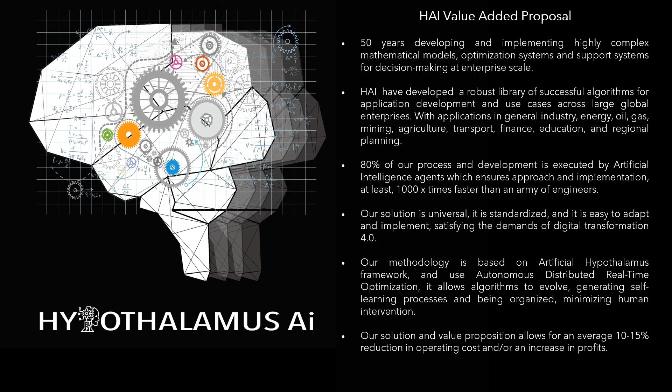Oil supply chain optimization: the oil and gas supply chain is made up of 4 links: upstream, midstream, downstream, and retail. The links are connected by multimodal transport networks.

The oil industry includes global processes of exploration, extraction, refining, transportation and marketing of petroleum products. The largest volume products in the industry are fuels, natural gas, fuel oil, and gasoline. However, petroleum is the raw material for many chemicals, including pharmaceuticals, solvents, fertilizers, pesticides, and plastics.

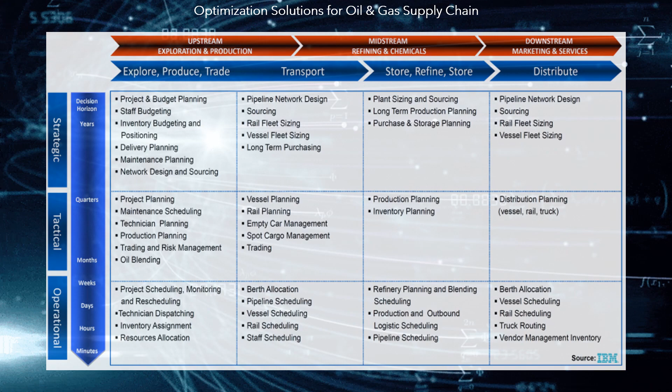The table, elaborated by IBM, shows a resume of the optimization solutions for oil and gas enterprises. The distribution chain of petroleum products begins in refineries, and ends at the sites of consumption of different types of products.

Optimization solutions in the transport chain of petroleum products can be classified by their hierarchy: strategic, tactics, and operating. Several of these applications will be discussed below.

Hierarchical coordination of planning tools. It is traditional to organize decisions hierarchically into strategic, tactical and operational. The operational decisions are divided into scheduling and advanced optimal control.

However, due to the technological progress generated by Industry 4.0, mainly in relation to smart metering systems, nowadays we can talk about a new type of online optimization modeling: real-time distributed optimization.

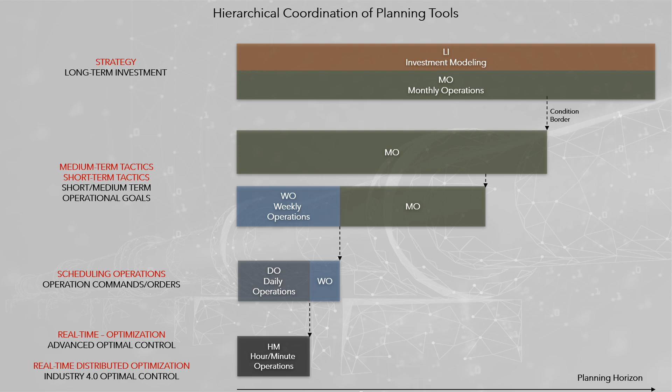From the point of view of mathematical modeling, hierarchical levels are intertwined and coordinated through the boundary conditions in time, and common modeling that can be shared. The modeling strategy of HAI is that all models of a decision support system can communicate with each other.

HAI Oil meets all the software solutions developed by HAI in different areas of application of mathematical optimization models, oriented to planning and to scheduling operations, in different businesses of the petroleum product supply chain.

Oil enterprise-wide optimization integrates mathematical models for each of the links in the oil supply chain, in such a way as to manage the planning of the supply chain with a holistic vision. The design of HAI Oil EWO was the result of work done for a multi-business oil company.

The union of models, and their coordination, forms the hypothalamus of an oil enterprise. The current computational power allows detailed modeling of the supply chain, considering individually all the systems that compose it. This allows visualization of all the existing bottlenecks that affect the maximization of economic gains.

All models developed by HAI, to support decisions in the oil industry, are interconnected through an information system. In this way the construction of the artificial hypothalamus is a question of joining the equations that make up the different models. Oil transport systems optimization corresponds to a general model, common to all types of oil products: raw, refined, natural gas, and biomass, which represents the process for a specific system, including particular equations when this is required.

It considers 2 types of transport modes: pipes and multimodal vehicles, like vessels, barges, train tanks, and/or truck tanks.

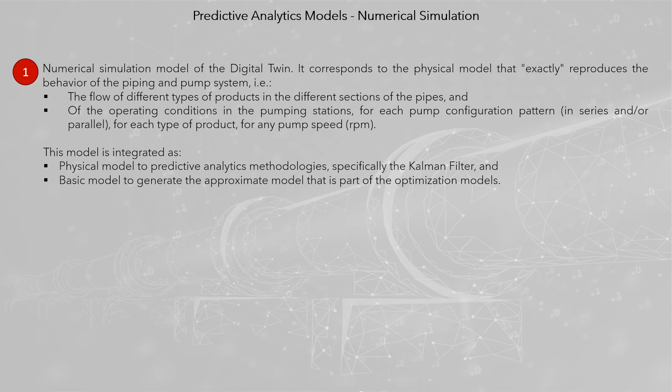Numerical simulation model of the digital twin. It corresponds to the physical model that exactly reproduces the behavior of the piping and pump system, that is, the flow of different types of products in the different sections of the pipes, and of the operating conditions in the pumping stations, for each pump configuration pattern, in series and or parallel, for each type of product, for any pump speed. This model is integrated as a physical model to predictive analytics methodologies, specifically the Kalman filter, and basic model to generate the approximate model that is part of the optimization models.

The numerical simulation model produces matrices, or tables, that are the reference of the exact operation of the piping system and pumping stations, and these tables numerically represent functions of the energy consumed as a function of pressure, flow rate, product type, DRA injection, ambient temperature, etc.

Validate and correct advanced analytics models, mainly optimization models. State estimation models the prediction and estimation of the variables that represent the state of the system. These can be pressure, flow, RPM, roughness, density, etc., and physical model parameters, estimation of the parameters involved in the equations that represent the physical system, and which are subject to uncertainty.

It is considered that the appropriate methodology is the Kalman filter, KF, including some of its variations and extensions. KF is, perhaps, the oldest and most robust methodology of hybrid predictive AI.

The numerical simulation model can be used to generate synthetic operation samples, as it is assumed to correspond to the exact representation of the system, and thus enrich the database, very useful in the case of young systems with few historical measurements.

Prescriptive analytics. To optimize, the following models are required. The operation, dispatch, of the pipeline, at least one or two days in advance. This implies a real-time operating model, whose planning horizon is divided into periods of hours, fractions, and which can be redispatched at any time, and the transport of hydrocarbons in relation to nomination, DRA dosage, energy consumption month by month.

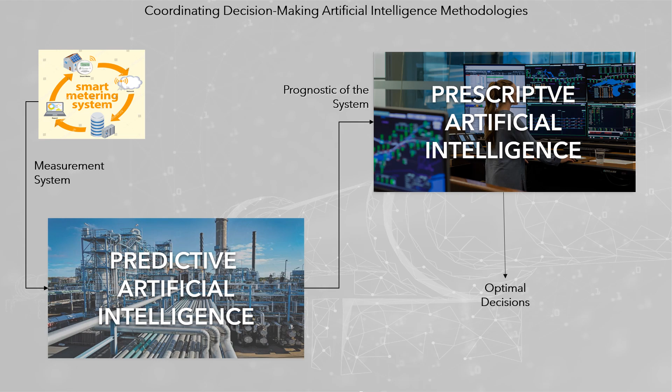Pipelines energy modeling. Predictive analytics models, forecasting. Based on hybrid models, model-driven plus data-driven, supported in state estimation methodologies, more specifically improvements and variations of the Kalman filter, KF.

Overall, the minimum functions of these models are smoothing, filtering and forecasting of the viscosity value of the crude oil transported in real time at any point of the pipeline, taking into account that, on a daily basis, laboratory tests are carried out to establish the viscosity value that is being transported. This actual viscosity data is confirmed a day after the shot by analysts.

Smoothing, filtering and forecasting of the viscosity value of products in real time, assuming that an inline viscometer is available. However, the measurement of this is not exact, but it maintains precision and allows you to verify the trend of the measurement. Identification of the operating periods during which, due to the quality of the product, density and viscosity, the dosage applied affected the transport of hydrocarbons.

Given the characteristics of KF, smoothing, filtering, and forecasting of the value of the pipeline's operating variables at any point, using the pipeline's physical model, and smoothing, filtering and forecasting of the value of pipeline parameters, e.g., roughness, slope, etc., when it is considered that these may be subject to uncertainty.

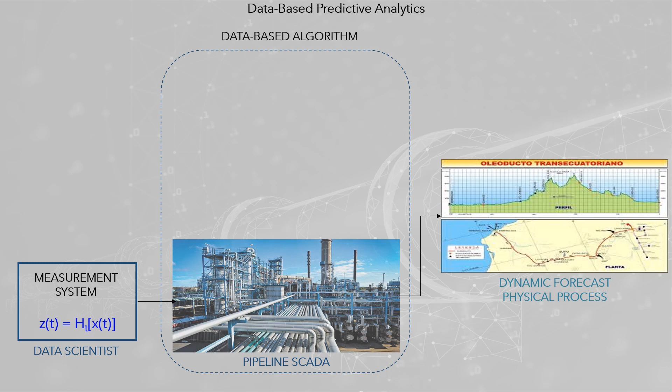Model-based models are based on the numerical simulation model, which must be fitted by means of algebraic expressions, to be expressed as a system of stochastic differential equations, finite differences, or finite elements. This requires an expert in the field of interest, in this case fluid mechanics, mainly in the transport of petroleum products. The integration of the two approaches gives rise to hybrid predictive analytics, which can be considered the appropriate method that takes advantage of the mathematical knowledge of the physical system and historical information.

The most well-known method, and most used, for more than 65 years, is the Kalman filter. The state estimate describes the system based on state variables, characterized by discrete, empirical probability distributions, and dynamic, empirical probability distribution functions that evolve over time.

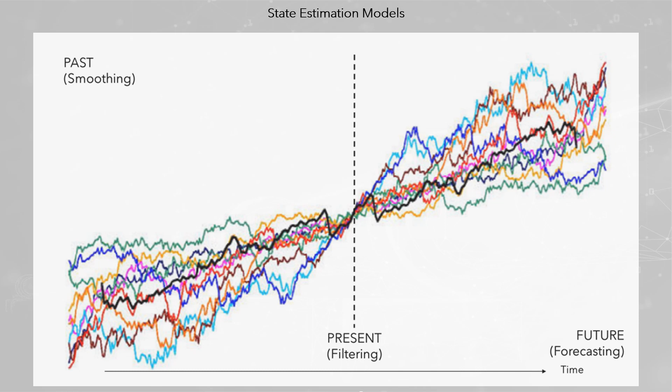Forecasting, predictions about the future, and filtering, predictions for the present. In a system under uncertainty, correcting the past may be just as important, if not more so, than forecasting the future and estimating the present.

Examples of applications of the Kalman filter in pipelines are system monitoring, parameter calibration, leak detection, and maintenance following PHM methodologies. Those interested in delving deeper into state estimation applied to the oil industry are invited to watch the video: Oil and Gas, State Estimation.

Optimization models.

Planning on a monthly level. It determines operating rules and practices that are optimal when the planners want to operate based on fixed operating rules over a period on the order of months.

The results of this model are as follows: batch cycles, order of the type of products, e.g. crude field 1, crude field 2, crude field 3 - this constitutes one batch cycle; and the number of pump cycles, to have an optimal line full.

The size of each batch, volume of each type of crude oil within the cycle, the expected DRA dosage for a certain batch program, and optimal setting of pumping patterns for a certain batch program.

Based on the above results, it is possible to plan the consumption of resources in the short to medium term, and if necessary, program the operation at a daily level, given a set of batches that you want to transfer along the transport system. Daily scheduling determines the optimal operating conditions for a planning horizon on the order of days.

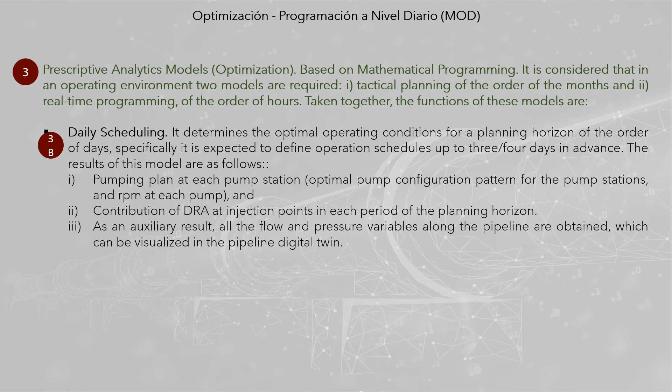The two models share equations and processes and differ in the specific characteristics of monthly tactical and daily real-time planning. The objective function of the models may vary according to the criteria of the decision maker, such as minimizing cost of operation, minimizing energy consumption, and maximizing oil products transfer.

The models, together or individually, can be used to support other decisions related to the operation of the transportation system. For example, supporting the ATP, available to promise, decision to accept or refuse transport of operational volumes for customers who request it without having a prior agreement.

To solve the mathematical problem of optimizing prescriptive analytics of a system, several approaches can be used: mental models, intuition and goodwill, simulation, physical model plus human reasoning, meta-heuristics, smart reasoning, machine learning, experiences, and best practices.

And mathematical programming, physical model plus optimization mathematics. Of the above alternatives, the only one that can guarantee optimal solutions is the one based on mathematical programming.

For many leading companies in the production of advanced analytics technologies, such as IBM, stochastic optimization and deterministic optimization are the analytical technologies that produce the greatest competitive advantage, and that provide the greatest ability to handle complexity.

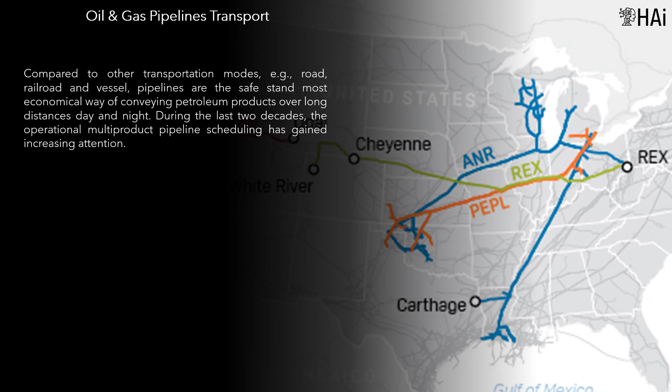During the last two decades, operational multi-product pipeline scheduling has gained increasing attention. The problem of optimization of pipelines involves safe, reliable and economical operation, in which, for each moment of the planning period, the flows, pressures and configurations of the pumping stations must be determined.

According to the different types of products that must be transported through the pipeline network.

The goal of the operation moves between 2 criteria: minimize energy consumption, an environmental criterion important to preserve the sustainability of the planet, and minimize the cost of energy, an economic criterion important in energy markets where rates change throughout the day.

On the other hand, the technical operating conditions, hydraulic conditions along the pipelines and at the pumping stations, must be respected regarding the flow of multiple, different batches that must flow through a network of pipelines that involves the synchronization of multiple sections connecting several production fields, refineries, and ports. The transportation system has 2 fundamental components: the pipeline system and the pumping stations.

The planning and scheduling of transport operations of products through pipelines, oil and refined products pipelines, aqueducts, gas ducts, and mineral pipelines, is done using 3 coordinated models. Sales and Operations Planning, S&OP, determines the total optimal volumes transferred during the planning periods, regardless of the sequence of products in the pipeline.

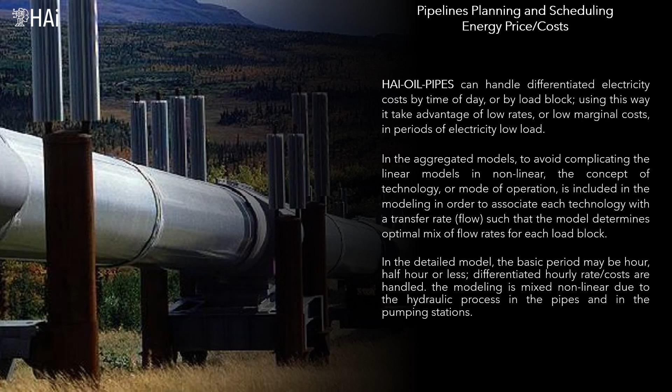The hydraulic characteristics of the flow depend on the type of oil product that is moving along the pipeline, and the blending of these crudes along the segments of the pipelines.

Three types of pipelines exist: oil pipelines, which transport crude oil from oil fields and ports; polyducts, which transport refined oil products like gasolines, diesel, and jet fuel; and gas pipelines, which allow combustible gases, natural gas, and liquefied petroleum gas, to be transported on a large scale and over long distances.

The optimization mathematical models for pipeline transport systems can be used with one of the following objective functions: minimum power, minimum cost, and maximum flow.

Optimization strategy: the problem-solving methodology must speed up the optimization process. The chosen method is based on problem breakdown for the different periods that make up the planning horizon.

The synthesis of the behavior of pumping stations by means of a non-convex hull for variables that synthesize their optimal operation as a function of pressure P and flow Q, for a given type of product associated with the batch, and coordination of the optimal solution using a Lagrangian coordination scheme.

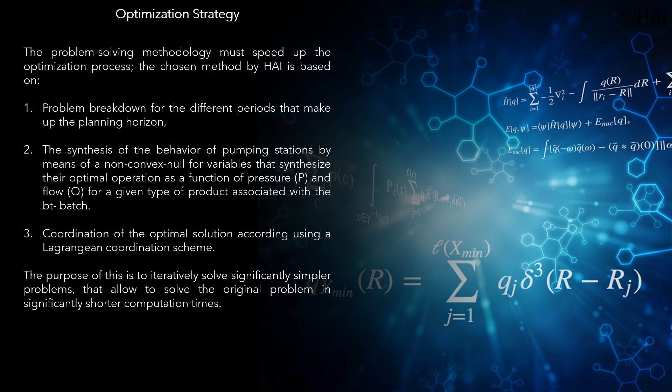The purpose of this is to iteratively solve significantly simpler problems that allow solving the original problem in significantly shorter computation times. After several analyses and numerical experimentation with mathematical models representing the detailed problem, the following design principles were reached in order to make the solution viable as specified.

Split and decompose the problem into multiple problems of lower dimensionality to obtain the solution based on an iterative process. Maintain the format of the problems as linear or quadratic to take advantage of solvers specialized in this type of problem, and perform pre-processing of information to accelerate the solution, offloading unnecessary repetitive calculations from the optimization model.

Pumping stations modeling. In the oil industry and other industrial processes, pumps are divided into two general classifications: variable head pumps - centrifugal and turbine - and positive displacement pumps, which include reciprocating and rotary pumps such as screw pumps.

The screw pump is one of the commonly used rotary-type pumps in the oil industry, mainly used in low-flow operation where the efficiency of a centrifugal pump would be very low. On the other hand, the versatility in handling high-pressure heads makes the centrifugal pump the most used in industrial applications.

The effect of a pump on a system is to increase total energy. The action and operation of a pump is defined in terms of its characteristic curves. These curves relate the capacity, or flow, of the pump in volume units per unit of time, versus the discharge pressures.

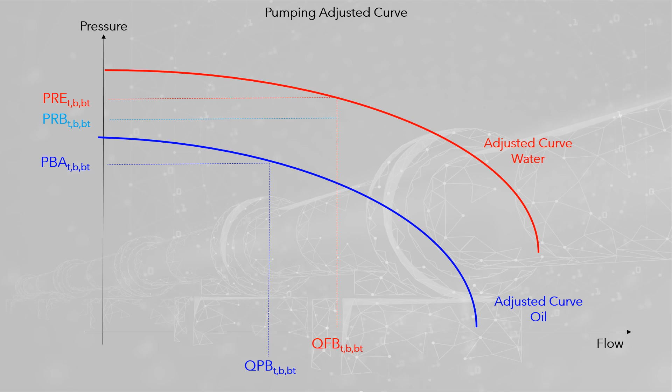If the pump rotation speed changes, adjustments must also be made to determine the actual operating conditions of the pumping station. When a defined flow is required, and knowing that the system curve varies, it is necessary to affect the pumping curve, finding a new operating point that meets the safe flow and pressure needs for the system.

The curve presents the relationship between energy consumed, or outlet pressure, and output flow in a pump. The relationship is exponential, implying diseconomies of scale in energy consumption as a function of flow. In theory, the pump has no limit in flow, but for an infinite flow rate it would require infinite energy.

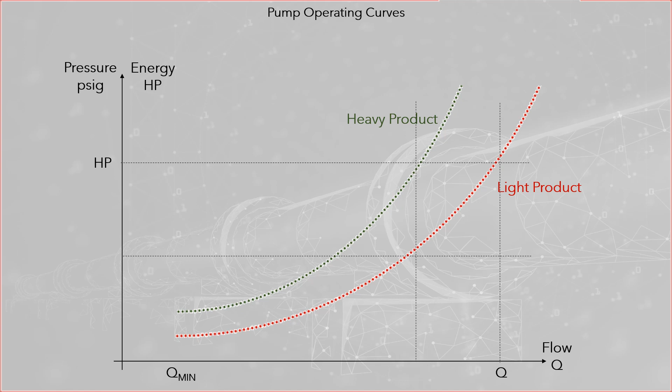On the other hand, it is normal that there is a minimum flow rate for the pump to begin operating. The curves depend on the product transported: to the extent that it is heavier and denser, more power is required for the same flow. This applies to petroleum and petroleum products, that is, the curve depends on the API grade.

A pumping station is composed of multiple pumps, usually of the same type. While the atom of the system is the pump, it is necessary to analyze the behavior of the station as a machine, whose function is to pump a product at a certain transfer rate and at a given pressure. The pumping curve is determinant of the operation of the pumping stations.

A way to affect the pumping curve is by setting up a pumping pattern at a pumping station where there are multiple pumps. There are two configuration shapes: in parallel, and in series.

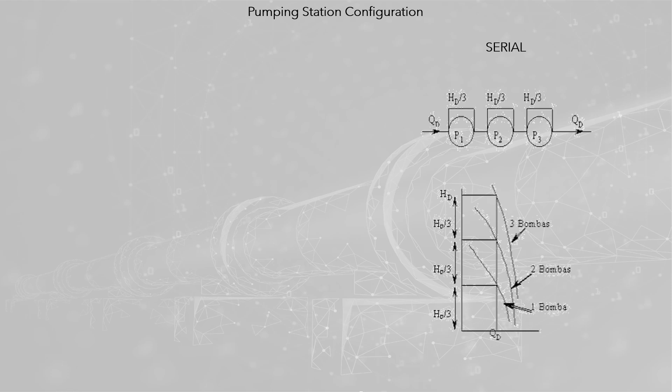When more than one pump is configured in parallel, the system receives higher flow rates - the sum of the individual flow rates of the active pumps - at the same pressure level. When two or more pumps are configured in series, the system receives greater pressure - the sum of the individual pressures of the active pumps - at the same flow level.

There are multiple operating patterns to configure the pumps of a pumping station. Its discrete character implies that selecting the most convenient one corresponds to a combinatorial mathematical problem.

In this case, the first pump must meet the operation between Qmin and 2Qmin minus an infinitesimal value. Starting with 2Qmin, it is optimal that the 2 pumps operate simultaneously. If the pumps are operated in sequence, as much energy as possible will be expended. This behavior involves a discontinuity in the optimization model which must be handled carefully.

The optimal energy consumption is the result of an optimization model. The graphic shows the optimal energy consumption versus flow rate for the XX station pumping heavy oil. The graphic shows the optimal energy consumption versus flow rate for the XXX station pumping heavy oil.

It can be noticed that the flows that force the ignition of a new pump generate a discontinuity in the curve. This complicates the solution of the problem, since for such flows, the curve has 2 values.

The graph presents the feasibility zone when the operation pattern is in parallel. The graphic shows the feasibility zone of the XX pumping station, operating in parallel, pumping mix oil.

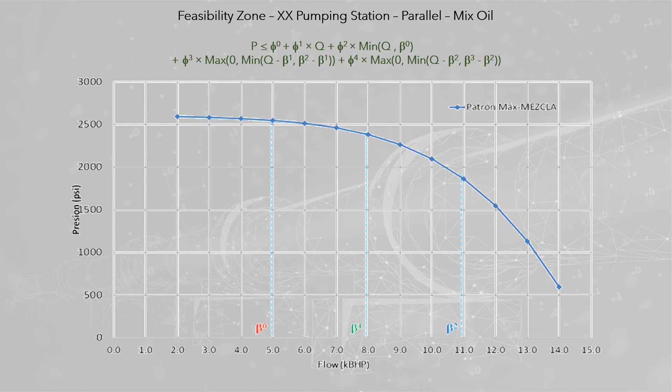Given the non-trivial form that gives rise to calculations to represent the pumping feasibility area, the pump curves can be replaced by an algebraic function based on parameters, estimated through a least squares model. The polynomial function, or directly the empirical function, may be approximated by a piecewise linear function. For each pattern and product, the feasibility zone is linearized, based on the hyperplanes that support the continuous feasibility zone.

The graphic shows the feasibility zone of the XX pumping station, operating in parallel, pumping mix oil. Now, the graph includes the linearized feasibility zone for pumping heavy oil. It is easy to notice that the area of operation for pumping heavy crude oil is more limited than for crude mix.

The graph shows the maximum limits set by the extreme pumping patterns, which are assumed to cover the remaining pumping patterns, and it defines the non-convex feasible zone for the pumping station operation.

If the restriction is viewed as disjunctive programming, it has two convex disjunctive zones, since the pumping pattern is parallel, or is serial, but not both. This seems to be the most appropriate approach, from the point of view of mathematical modeling.

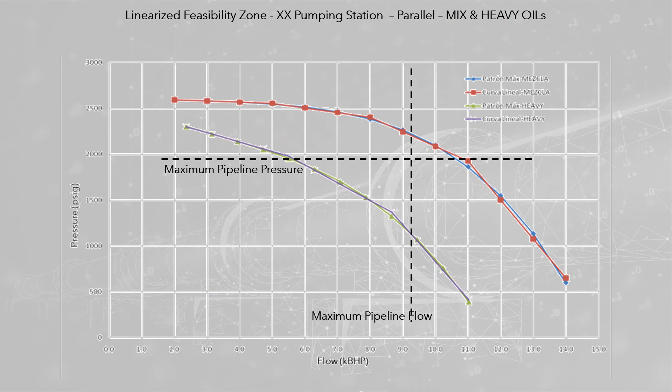The above feasibility zone must be intersected with the restrictions imposed by the pipeline, usually maximum limits on flow and pressure. The graph includes the limits in flow and pressure, due to the pipe. The rectangle determines the feasibility zone for the pumping of mix oil. This indicates that the limitations in the pumping of mix oil are due to the pipeline.

In the case of heavy oil, there are limitations due to the pipeline, and due to the pumping station. The operation of a station is determined by the following decision variables: pump configuration, in series or in parallel; engine speed, RPM; and flow rate and pumping pressure.

The configuration of the pumping stations is a central part of the decision-making process, as depending on the pumping pattern, the combined action of the patterns makes it possible to meet the flow pressure demand in multiple ways. The optimization requires a detailed hydraulic model, at the level of each type of pump used in the pumping system, and for each type of product being pumped.

Considering the integral optimization of the entire pipeline, using large-scale optimization methodologies, partition and decomposition, the operation of each pumping station must be optimized through a mixed integer linear programming model, MILP, that minimizes the amount of energy required to dispatch a batch QP for each type of oil.

Associated with each point of the grid, the following data is stored in an optimization database: the optimal consumption, the operating pattern that produces it, the dissipated pressure in the valve, unused available energy, and the RPM of the variable speed motors.

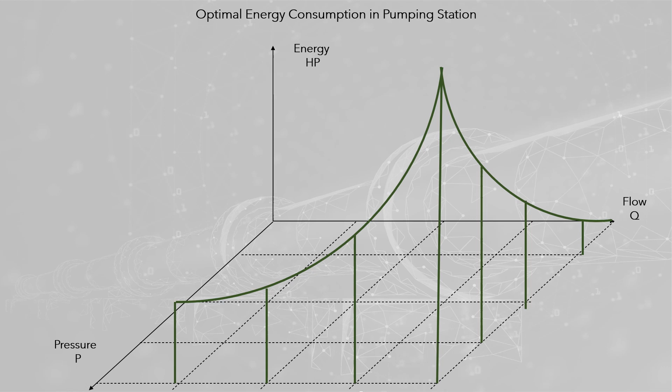The problem of determining optimal energy consumption in a pumping station is a relatively simple problem, but complex to solve, due to its combinatorial character.

The image shows the grid of optimal operating policies for any pumping station of the system. To build it, the flow and pressure are discretized, and the problem of optimizing the operation of the pumping station, for each QP pair, for each product that flows through the station, is solved.

To obtain a continuous solution, a convex linear combination is used, based on the 4 points that limit the polygon to which the solution belongs.

It is an approximation. This process works well for the case where all 4 points use the same pumping pattern. If this is not the case, it should be analyzed how to resolve the situation.

The grid corresponds to a hull, convex or non-convex, which represents the optimal solutions of the operation of the pumping stations, as a function of the product, the pressure and the flow.

If the envelope is convex, its incorporation into other models generates linear constraints. If it is non-convex, it implies the inclusion of binary variables, and will generate an MIP problem.

The integrated optimization of pipeline systems requires that all the pumping stations must be considered jointly. For real systems, it becomes a highly complex mathematical problem.

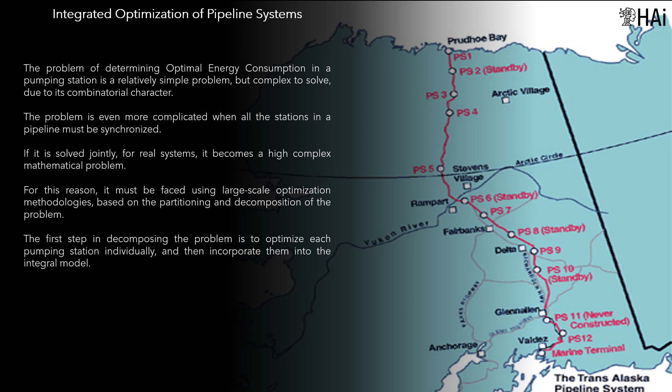For this reason, it must be faced using large-scale optimization methodologies, based on the partitioning and decomposition of the problem. The monolithic approach for oil pipelines optimization seems to be an impossible way, since the combinatorial character of the problem can make it impossible to solve in reasonable times.

The first step to the decomposition of the problem is the generation of the convex hull of all pumping stations. This process involves extracting from the monolithic model, the model of the pumping stations. Using this model, convex hulls will be produced.

The results of the process must be stored in a database, for later use in the pipeline system optimization model. The integral model must incorporate the equations that allow working with the convex hull, to determine the flow and pressure for each product that flows through the piping system.

The process of generating the convex hull can be done offline, prior to the use of the optimization model. If the APIs of the products are constant, as in the case of refined products, the convex hull can be used for multiple runs of the optimization model.

When it changes frequently, new convex hulls must be generated as products with new APIs appear, as is the case with crude oil. Pipelines energy modeling.

A pipeline consists of sets of lines. The lines join two main nodes of the pipeline: pumping stations, and product terminals where there are storage tanks. Lines are composed of sets of sections that join nodes.

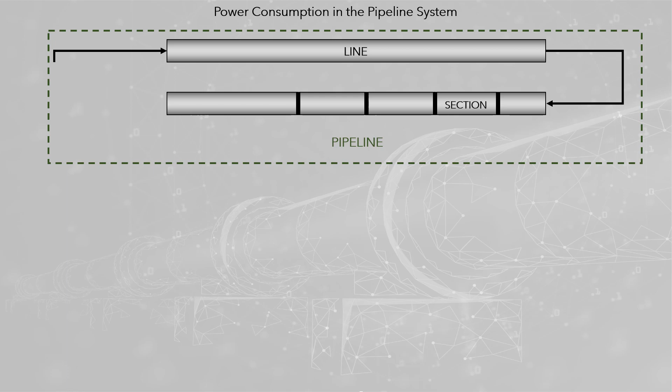Each section has its own physical characteristics: slope, rugosity, thickness, length. The main nodes are characterized by the industrial infrastructure located on the node. All nodes are linked to a geoposition in the terrain.

The batches begin to flow along the first section of one line of the pipeline, and must therefore be linked to the line through which they enter the system. The matter and energy continuity equations must be met on all sections and nodes.

The above concepts should be related to the operation of the transport system, using variables that determine for each period the position of the batch, which may be occupying several sections of one line, or several lines. The possibility of shutdown of the system, non-operation, zero flow, or of a pumping station, is also considered as a decision in the model.

In general, the study of pressure loss in a duct system indicates that there are three effects that produce the pressure drop: friction, gravity and acceleration.

The most important effect for the behavior of pressure losses is that of the operating flow, which must be added to the pressure losses due to gravitational action and friction, which depend on the density and viscosity of the fluid. The acceleration effect in many cases is assumed to be negligible.

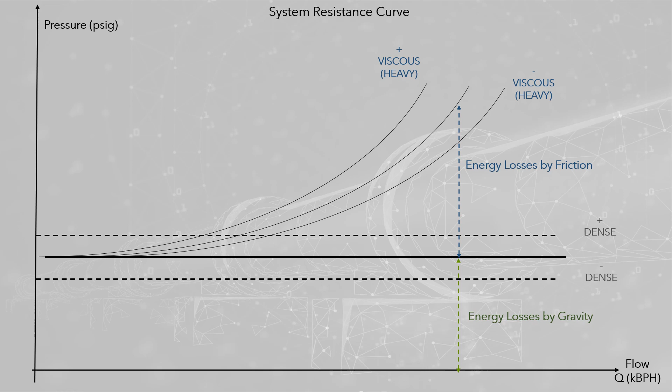As fluids of different characteristics, viscosity and density, enter the pipe, the work to be performed for transport changes, represented by the required pressure. This can be viewed graphically using the pressure loss representations as a function of the flow, called system resistance curves. These curves reflect the behavior of the pumping head required for a given flow rate.

The pipeline height profile is a determinant of the energy required to transport a certain volume of a specific product, at a certain transfer rate.

The energy losses in the sections depend on their characteristics, the type of product, and the transfer rate or flow. They are independent of the profile of the pipe. Energy losses as a function of flow are exponential.

The energy generated by the pumping stations provides the energy required for the transport of the products, to the extent that the energy that is in the pipeline is consumed. The energy profile in the pipe must always be positive, so that the product can flow.

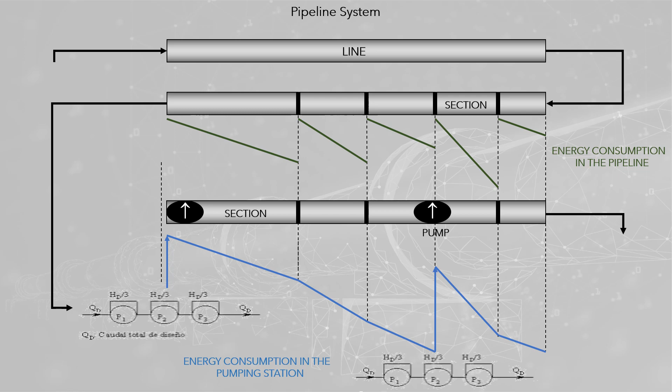There are multiple topologies to connect the pumping system to the pipe system. For real-time operation, this connection is very important. For tactical planning, it is less important, and may be approximated.

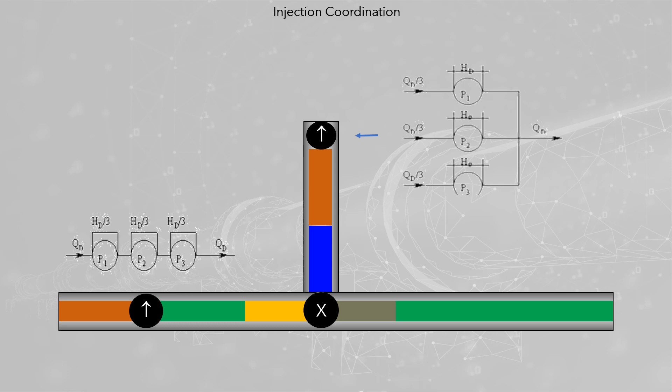The image shows the synchronization of products injection in a pipeline. These can enter the pipeline in multiple ways, which must be able to be represented in a real-time model.

Optimizing batches sequences. The objective of modeling is to determine the sequence of batches that should flow in the pipeline. For discrete time models, the result is a matrix, sections by periods, which indicate the batches that occupy each cell of the matrix.

This implies that the mathematical model must establish the energy loss curve of the mixture, considering the operation of the pipeline, as presented in the diagram. Experiments conducted by HAi indicate that a linear combination, weighted by the volume of each product, is appropriate.

Optimizing batches sequences. The batch sequence optimization problem is complicated by its combinatorial character, with precedence constraints. Precedence restrictions reduce the domain of combinatorics, since they do not allow all combinations. This facilitates the solution of the problem but leads to greater complexity in modeling.

An example of this type of constraint is the one that does not allow a product of lower quality and cost, like kerosene, to go in the batch previous to a product of high quality, like jet gasoline. This prevents contamination of products.

These problems are of the MIP type, and can be solved by mathematical programming, or by constraint programming. HAi has selected to work with mathematical programming.

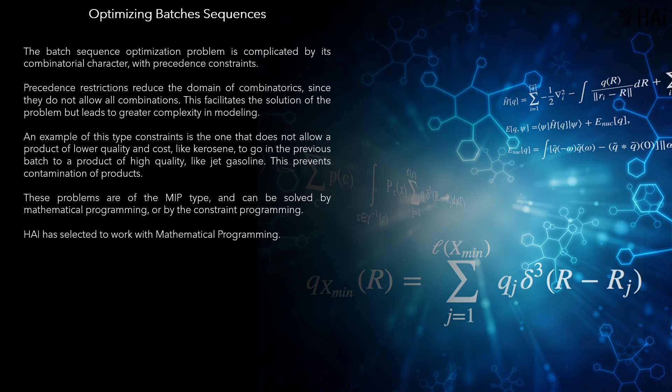Temperature impact optimization. Impact of temperature in pumping oil products. Due to seasonal variation, the average line temperature may change in time and space.

To improve the precision of the operation, in the medium and short term, predictive artificial intelligence tools must be available, to incorporate their projections as part of the input parameters of the optimization mathematical models.

8 degrees Celsius of temperature difference can imply about 25% of difference in energy consumption. This impact is not limited to pipelines, it also affects production fields.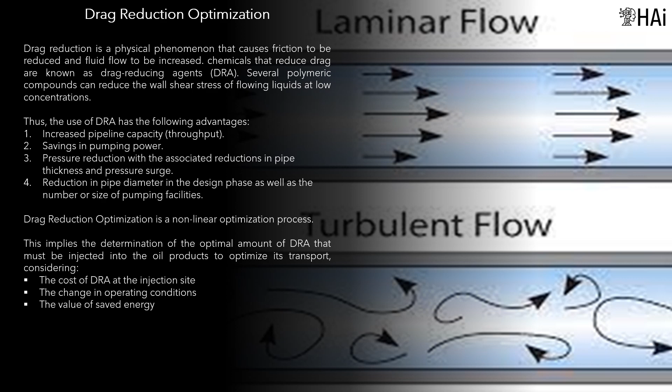The existence of DRA dates back 50 years, when Conoco Incorporated patented the product. Its first commercial use was in the Trans-Alaskan Pipeline in 1979, where a 50% drag reduction was achieved, thereby increasing the capacity of the pipeline from 1.45 to 2.1 Mbpd (Berger et al., 1982). This resulted in eliminating the need for installing two pumping stations, which were planned to achieve the mentioned increase in capacity. Since that time, DRA has been used in many petroleum product pipeline installations.

This drag reduction optimization involves an empirical, experimental process to determine the variations in operating conditions, pressure and flow, considering the conditions of the pipeline and the pumps, and the impact on operation of the concentration in weight and volume of the type of DRA used. To do this, a model of the pipeline, a digital twin, must be built, considering the theoretical mathematical equations of the flow, and validating them with controlled measurements, using a model supported by artificial intelligence.

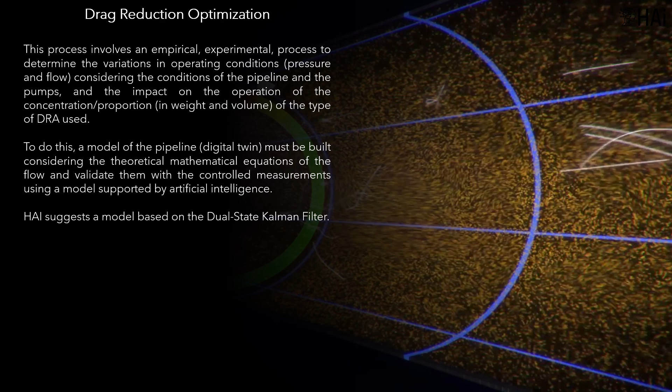The benefits of DRA optimization are: increase pipeline throughput, reduce energy of pump stations, reduce pipeline flow friction, reduce carbon emissions, reduce operation pressure, save energy costs, increase technical and economical productivity, and increase transport capacity, thereby avoiding construction and expansion of pipelines. Pipeline digital twin.

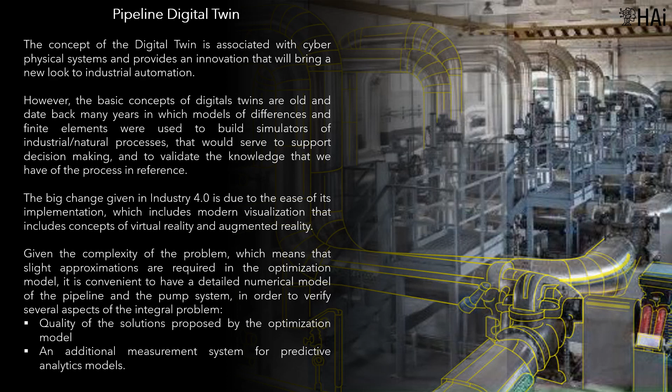The concept of the digital twin is associated with cyber-physical systems, and provides an innovation that will bring a new look to industrial automation. However, the basic concepts of digital twins are old, dating back many years, in which models of differences and finite elements were used to build simulators of industrial or natural processes that would serve to support decision-making and to validate the knowledge we have of the process in reference. The big change given in Industry 4.0 is due to the ease of its implementation, which includes modern visualization that includes concepts of virtual reality and augmented reality.

The following graphic, taken from Rejowski and Pinto, 2005, illustrates the problem of planning polyducts, which has two fundamental aspects: sequence of batches, and hydraulic conditions along the polyduct. The planning of a polyduct aims to determine goals, not transport orders, for the transportation of oil refined products in the medium term, that is, in the order of weeks or months. The results sought are defined goals for the sequence of batches to be dispatched and define their technical specifications, volume, transfer rates, and DRA injections.

The time, period, of departure and arrival of batches. The level of inventories at each terminal linked to the pipeline system. The operation plan of the pumping stations, and the minimum cost of the operation of the system.

The complexity of the problem of programming the sequence of batches in a polyduct is evident, since it corresponds to a combinatorial problem that involves binary variables to coordinate the assignment of sequences to the different batches, which defines a MIP problem with NP-hard complexity. If the transfer rate is considered as a variable, the problem will become a MINLP problem, which further complicates its solution. Three fundamental aspects must be considered in modeling: the nonlinearity that is generated in the movement of the batches, the nonlinearities in the pumping stations, which may be non-convex, and the rules that must satisfy the sequence of batches of the different products.

Not all combinations are allowed. HAI's criterion is to maintain the model as a MIP optimization problem.

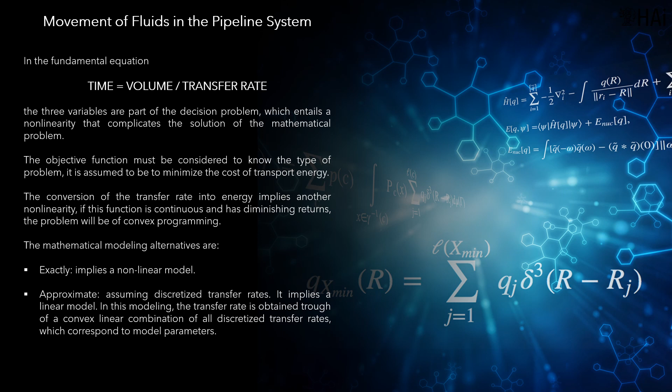In this modeling, the transfer rate is obtained through a convex linear combination of all discretized transfer rates, which correspond to model parameters. The approximate movement of fluids implies the modeler selects transfer rates to simulate the flows in the model. It is equivalent to dividing the line into lines, each with a fixed transfer rate, which linearizes the problem for each line, and the effective transfer rate is calculated as a linear combination of each of the transfer rates.

The lambda multipliers represent the fraction of time during which the line operates at the associated flow. The approximation must be made for each line and applies to all sections that are flowing in the system during period t. This approach is appropriate when speed is required to obtain an approximate optimal solution, near to the real optimal solution. It is the case of tactical planning, but not the case of real-time scheduling.

The HAI proposal for pumping station operations is to model the pumping system using a convex hull, calculated offline, which corresponds to a linear model. For those parts of the pumping operating system which involve discontinuities, and therefore nonlinearities, it is suggested to make approximations which guarantee convexity.

Planning based on previous experiences: discrete formulation of continuous process. Due to multiple limitations that existed in the past, for example limited computing capacity, optimization algorithms in the process of growth, lack of knowledge of high-performance optimization methodologies, and difficulty formulating complex math problems.

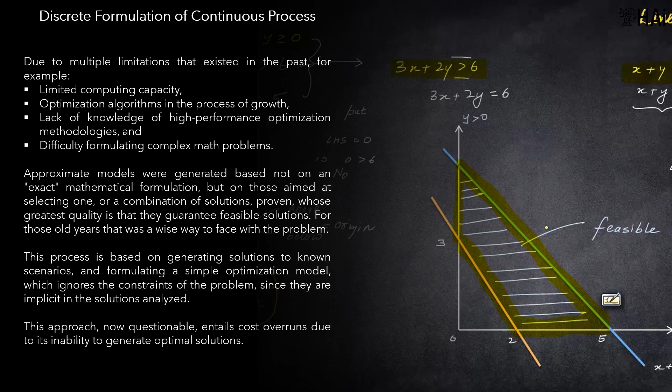This process is based on generating solutions to known scenarios, and formulating a simple optimization model, which ignores the constraints of the problem, since they are implicit in the solutions analyzed. This approach, now questionable, entails cost overruns due to its inability to generate optimal solutions.

To analyze the impact of this approach, consider that the green shaded zone represents the real feasibility zone of a continuous process. If a discrete formulation is used, that is, discrete solutions are assumed for continuous variables, the real feasibility zone will be reduced, affecting the optimization, so that the profits provided by the model will be seriously reduced, possibly reaching zero.

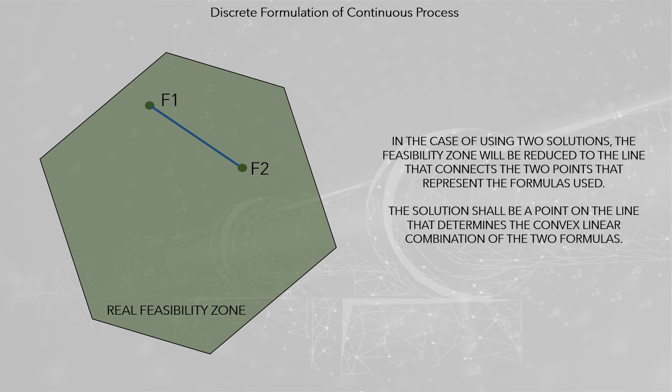In the case of using a single solution, there will be no optimization, and the feasibility zone will be reduced to the point of the formula used. In the case of using two solutions, the feasibility zone will be reduced to the line that connects the 2 points that represent the formulas used. The solution shall be a point on the line that determines the convex linear combination of the two formulas.

In the case of using 3 or more solutions, the feasibility zone will be reduced to an area delimited by the points associated with the formulas. The solution will be a point inside the modeled feasibility zone, which can be expressed as the area containing all the convex linear combinations of the formulas used.

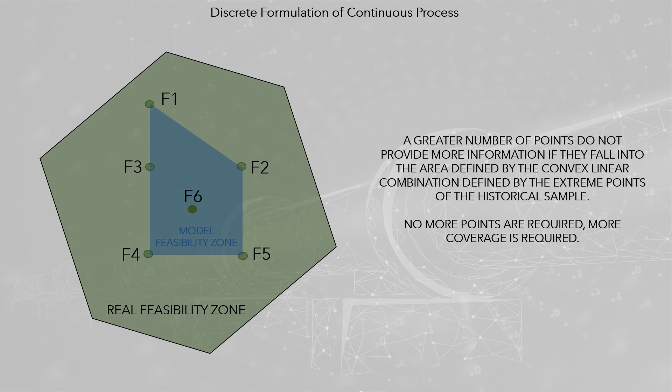To the extent that discrete solutions are incorporated, the modeled feasibility zone will approach the real feasibility zone. The quality of the approximation depends on the coverage made by the discrete formulas of continuous space, something similar to what happens in the design of experiments. A greater number of points do not provide more information if they fall into the area defined by the convex linear combination, defined by the extreme points of the historical sample. No more points are required, more coverage is required.

In any case, the representation based on discrete formulas generates sub-optimization, due to a smaller feasibility zone than the real one. There are large-scale optimization methodologies, such as Benders' theory, which starting from an approximate feasibility zone are forming the real feasibility zone, to achieve the optimal solution.

In this case, the solutions that should be incorporated are generated by an artificial intelligence based on mathematics, and not on the practices or mental models of humans.

In concrete terms, sub-optimization implies lower ROI captured by mathematical models. Saving a little money in mathematical complexity but leaving important money on the table. It is a bad business.

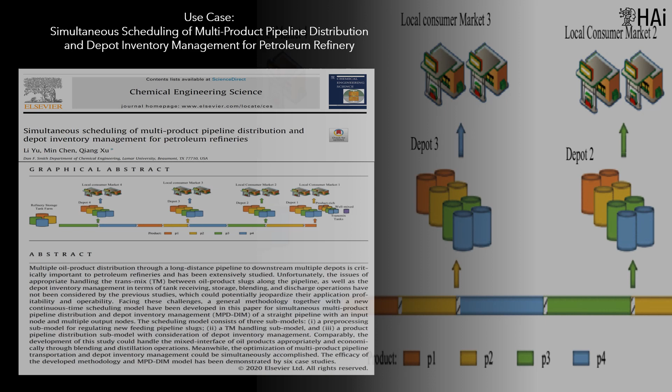Case: optimization of scheduling of multi-product pipeline and depot inventory. The following is the summary of the paper: simultaneous scheduling of multi-product pipeline distribution and depot inventory management for petroleum refinery.

The scheduling model consists of three submodels: a pre-processing submodel for regulating new feeding pipeline slugs, a TM handling submodel, and a product pipeline distribution submodel with consideration of depot inventory management.

The MPD-DIM could handle the mixed interface of oil products appropriately and economically through blending and distillation operations. Meanwhile, the optimization of multi-product pipeline transportation and depot inventory management could be simultaneously accomplished. The efficacy of the methodology and MPD-DIM model has been demonstrated by 6 case studies.

The integrated planning of a pipeline system that links different streams in the oil chain is the central part of the enterprise-wide optimization of an oil company.

For a petroleum products transportation company, its business may be to efficiently transport petroleum products. But it can become more profitable not to transport them. This is related to the definition of which is the product that is transported and marketed: oil and derived products that are physically transported, or the technical specifications that are transported in the products.

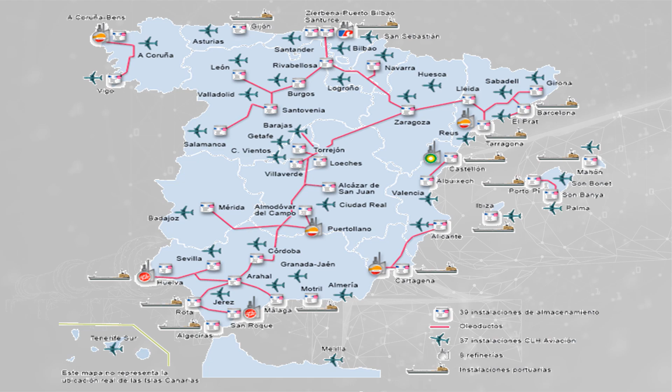The technical and commercial characteristics of the product depend on the type of oil product that is moving along the pipeline, and the blending of these products in the terminals of the pipelines. It could be the case of moving a product to a terminal to complement the technical specifications of the existing products in the terminal, mix them and deliver them to the customer, depending on the commercial transaction.

The problem discussed in this section focuses on the distribution and blending of oil produced in the fields, to be distributed to the terminals of the oil facilities, where it will be delivered for use in refineries, own or in other markets. Refineries are modeled in an aggregate way, as an exogenous demand for oil.

On the other hand, there is the transport of derivative products. Integrated optimization of the entire oil blending chain implies a holistic model of the problem. This vision produces greater economic gains than its piecemeal modeling.

The model blend allows planning of transportation operations for multiple oil production systems, with a view to delivering crude oil blends to refineries and/or ports that are connected to the system. The system accepts any type of connectivity topology between facilities.

The supply of oil is given through fields producing different types of crude oil, with a predefined availability. This offer can be defined dynamically, considering the evolution of the oil-producing fields' operations plans. It is also possible to consider buying crude oil in the spot market.

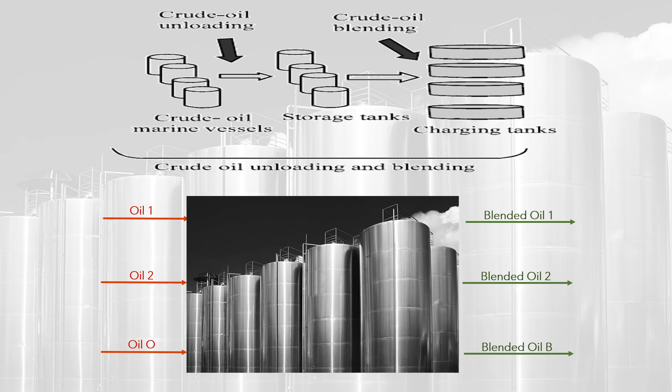The purpose of optimization is to determine the optimal operation of the system, in such a way as to maximize the utility produced, or to minimize the costs of satisfying a predefined demand. A terminal can be conceptualized as a machine that takes multiple oil crudes, mixes them, and produces multiple blended crudes. There are also, at the end of the refinery, terminals oriented to handle the finished products and their blending.

The features of this system are: oil is produced in the production fields, each field being characterized by the type of oil it produces. Such oil must enter the oil distribution system that feeds export ports, through which commercial commitments to sell oil in the spot market, or the financial markets, or directly to the refineries.

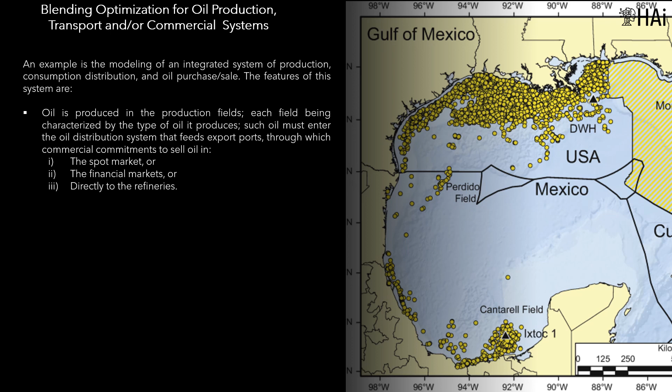Optimizing the blend of crude oil and petroleum products is a multi-million-dollar application. It can be coupled to the production of oil fields, in such a way as to establish optimal plans for production, distribution, export and import. In addition, blending processes extend to petroleum products, for example, lubricants.

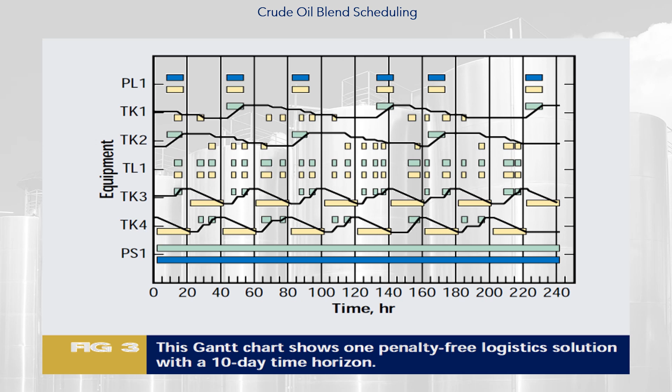Hypothetical benefit calculations. Total yearly savings in American dollars. Quality target variability improvements such as whole crude oil sulfur, 2 million; reduced chemical injection, 100,000; distressed sale of crude oils from the refinery, 325,000; pipeline penalty charge for changes in sequence or timing, 75,000; spot opportunity for crude oil trades, 250,000; and reduced working capital, 100,000. Total year: 2,850,000. These hypothetical benefit calculations translate into over $2.5 million worth of potential refinery profit that would not have been achieved with manual scheduling alone.

It must be emphasized that this number only provides a benchmark or yardstick to Pareto, at least qualitatively, the priorities in terms of choosing between other possible and competing capital investment projects at the refinery. From the perspective of overall crude oil costs of the refinery over 1 year, this $2.85 million in savings is less than 0.41% of the total feedstock cost.

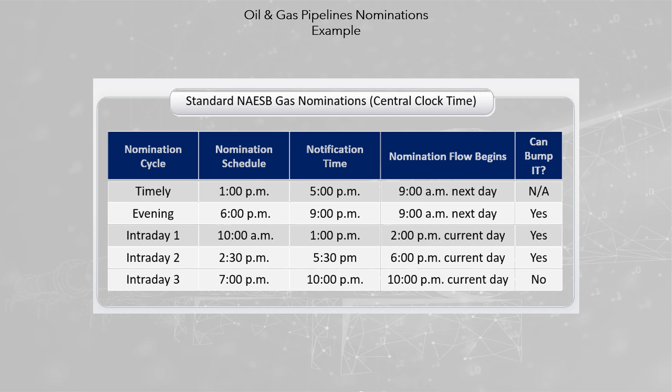Mathematical modeling. The nominations have several relationships with mathematical modeling, namely: short term, determine the demand for transport services that the carrier has accepted and authorized, normally assumed as input data that is not affected by the real-time or short-term model. Medium-term, tactical planning, depending on the agreements between carrier and dispatcher; the medium-term model, of the order of months, weeks, days, can adjust the nominal transport plan, to optimize the economic benefits, and to improve the technical conditions of the operations. And long-term, strategic planning; this modeling can be related to long-term contracts.

They can be used to accept the contract, verifying the required transport capacity, and definition of the price, or the marginal costs associated with attending the long-term contract.

At the end of the last decade of the last century, Oil Express, a global natural gas company that operated several natural gas producing fields in multiple countries, asked HAi for support to define a natural gas field exploitation planning strategy, using highly complex mathematical models to analyze the entire decision-making environment. The challenge was to develop a model that supported decision-making regarding the exploitation of natural gas fields and its impact on Oil Express finances.

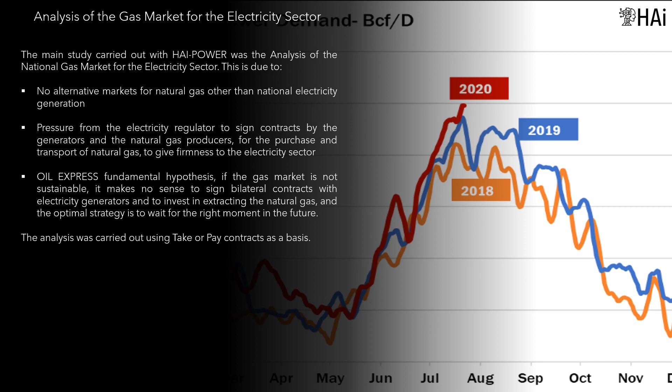In 1997, analysis of the gas market for the electricity sector. The main study carried out with HAI-POWER was the analysis of the national gas market for the electricity sector.

This is due to no alternative markets for natural gas other than national electricity generation, and pressure from the electricity regulator for generators and producers of natural gas to sign contracts for the purchase and transportation of natural gas, to give firmness to the electricity sector. Oil Express's fundamental hypothesis: if the gas market is not sustainable, it makes no sense to sign bilateral contracts with electricity generators and to invest in extracting the natural gas, and the optimal strategy is to wait for the right moment in the future. The analysis was carried out using take-or-pay contracts as a basis.

The take-or-pay (TOP) is a contractual clause requiring the buyer to take delivery of a specific amount of goods or services from the seller, or pay a fine if they do not. Thus, it protects the seller against potential losses if the buyer refuses to complete the purchase by a particular date. A TOP clause is common in energy industries, including oil, natural gas, mineral, and coal, seeking significant investment. It is also called the kill clause. The contract is normally signed before the companies start oil, natural gas, mineral, or coal exploration. Therefore, it is a type of offtake agreement.

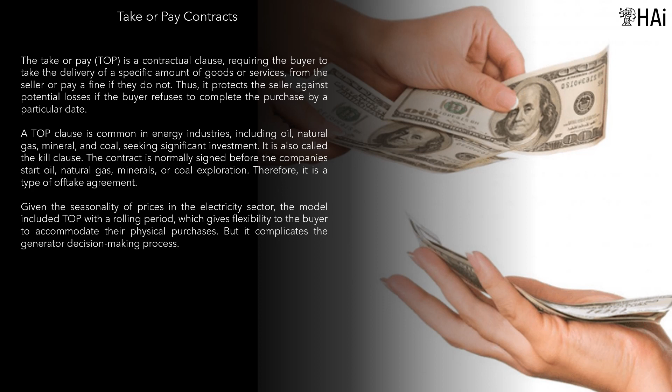Fuel supply contracts directly affect dispatch. In general, a contract has the following components: a percentage of the maximum consumption is purchased in the take-or-pay mode, the surplus over the take-or-pay is purchased under the pay-as-you-go modality, and there is a rolling period to consume the take-or-pay part.

Given the seasonality of prices in the electricity sector, the model included TOP with a rolling period, which gives flexibility to the buyer to accommodate their physical purchases, but it complicates the generator decision-making process.

To stimulate the natural gas market for the electricity sector, government institutions conducted a reference study, which was taken as a reference to analyze the market using the SHTG model. The main characteristics of the study: the rolling period was 6 months, 10 plants were considered for take-or-pay contracts with an installed capacity of 2,813 megawatts, the take-or-pay percentage was 30% for the plants of the center and 70% for the plants in the border, and the electricity dispatch planning model used by the ISO operator was adapted to represent the impact of TOPs.

The table presents the summary of the characteristics of the scenario studied by the regulator to stimulate the signing of contracts in the natural gas market. The percentages of TOPs fixed do not come from an optimization model, they were perceptions of what should be.

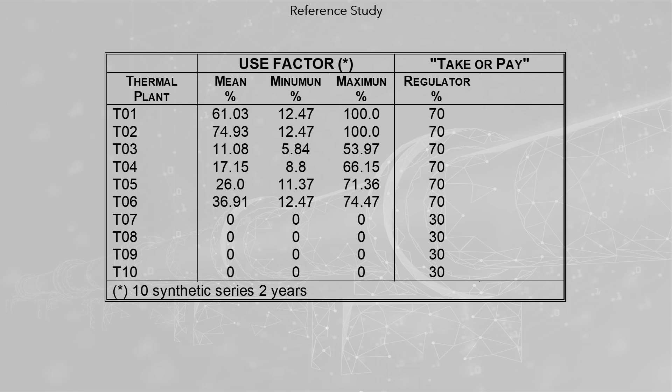The chain of qualitative effects which derive from TOP contracts is relatively easy to foresee. The bid price of the thermal plants to the spot market will go down, because they have turned the variable cost into a sunk cost. In the extreme, it could reach zero. This will lead to an increase in the dispatch capacity of thermal plants, and the fall in spot prices.

But quantitative effects are not intuitive, they can't be calculated with an Excel spreadsheet. As the volume of natural gas contracted through TOPs increases, it can be expected that hydro plants will lose share, thermal plants will gain participation, and the spot price will go down. A cheap, economical resource that is not 100% reliable, hydroelectric energy, is being exchanged for another more expensive but more reliable, thermal energy. It should be considered as a risk premium.

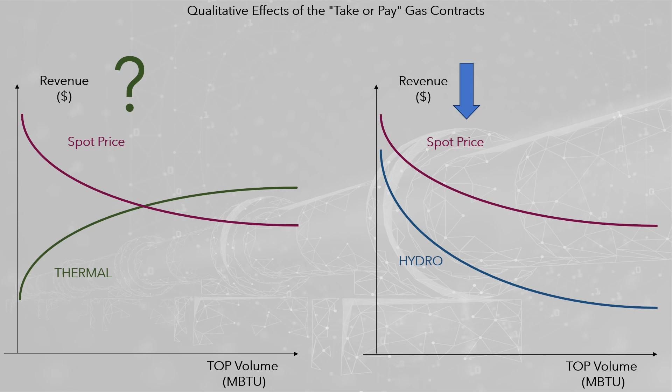From the point of view of income, revenues from hydro generators will decrease, and the change in the income of thermal generators cannot be evaluated a priori. Therefore, a mathematical model is required to evaluate quantitatively the natural gas market: modeling take-or-pay contracts.

To carry out the study, 5 cases were implemented to consider the top modeling. The following is the code associated with the modeling and description.

No top, no contracts: free, optimized contract generation. Equations are included in the dispatch model, HAI-POWER, to accurately represent top contracts.

Rodante, minimum rolling generation: the minimum generation of the thermal plant is forced during the rolling period to ensure compliance with the contract. Mensual, minimum monthly generation.

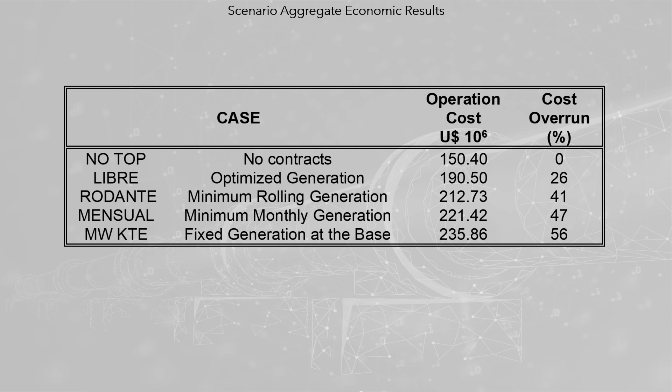The impact can be summarized as: top contracts as proposed adversely affect the aggregate of all generators, and when mathematical modeling practices are incipient, this will negatively affect the market.

A good way to present the financial information is the accumulated curve of estimated operating income over the entire planning horizon. The graph shows operating income of hydraulic generators. These graphs present the aggregation of all generators, but they exist for each individual generator.

In the case of this hydro generator, paradoxically its financial health does not depend on its own actions, but on that of other agents. If thermal generators assume a rational position, the financial health of the hydro generator will not be affected. But if they assume an irrational position, ignoring mathematical laws, the hydro generator can go bankrupt.

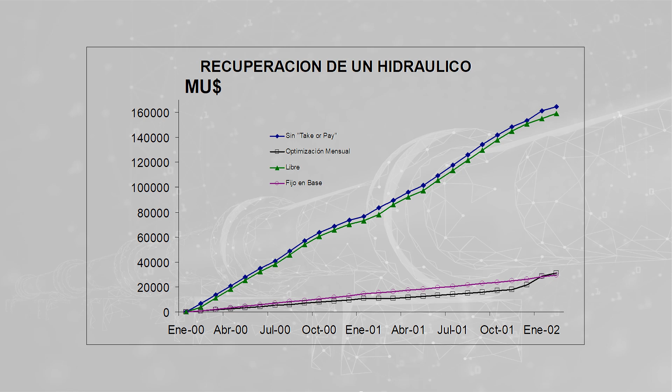In simple terms, this defines an undesirable externality in a market, in which the errors of one agent can be paid by other agents. The golden rule is everyone pays for its own mistakes and takes advantage of their right decisions. The situation of thermal generators is different: for the planning period analyzed, the costs of top contracts cannot be recovered.

HAI-POWER allows Oil Express to financially analyze all market participants, both potential customers and clients of the competitors, which allows Oil Express to perform scientific market intelligence activities.

Considering that the proposal of tops made by government entities does not come from an optimization process, but were defined considering logic and good practices, HAi and Oil Express proceeded to make an adjustment in the value of the tops, so that they approached an optimal value, and thus analyzed the behavior of the market in these conditions. These adjusted values do not come from an optimization process.

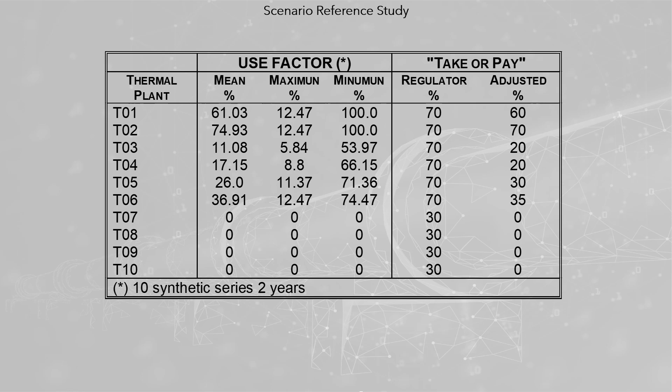Values set based on mental rules can affect the market, even bankrupting it. It could be concluded that the greatest damage that can be done to the market is to establish reference values without justified mathematical support, since there are values of the tops that minimize the values of the risk premiums for reliability, without profoundly altering the economic behavior of the market.

It is coherent that if the thermal generators act rationally, they do not drastically affect the hydraulic generators as a consequence of their bad decisions.

In the case of cost recovery of thermal generators, the situation is more complicated, including because the optimal values for the tops will generate problems of bankruptcy and liquidity, which will be more serious if the top values do not have appropriate rationality. This indicates that the electricity market cannot guarantee that thermal generators can pay the top contracts that are theoretically required by the government.

The model turned out to be correct, since in early 1998 it detected the market crisis between 1998 and 2000, which led to bankruptcies of thermal generation companies.

Successful decisions. For its part, Oil Express has proven that there are no market conditions, that is, there does not exist a good set of profitable thermal generators that can pay for gas through top contracts required to guarantee the extraction of natural gas. If it is a question of compensating the situation based on price, if Oil Express sells natural gas at high prices, it is possible that Oil Express must recover bankrupt industrial company assets. Everything seems to indicate that the optimal decision may be to delay the investment, waiting for a market with better conditions.

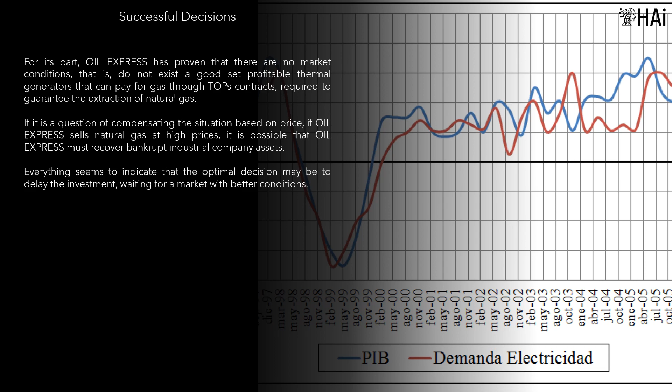Oil pipeline scheduling. The white paper 'Oil Pipelines Real-Time Optimization' contains detailed information about the model described in this section.

The work carried out by HAi is the result of the empirical analysis of multiple implementation alternatives for the solution of the problem associated with the optimal operation of an oil pipeline system, ensuring that the methodology implemented complies with detailed hydraulic modeling of the pipeline system and pumping station system, to manage electricity rate schemes differentiated by time slots. The planning horizon is 72 hours of operation with a 10-minute breakdown.

The first version of the model ran on a personal computer in 2012. The input data of the mathematical model includes lengths, diameters, thicknesses of pipes, mechanical strength, internal roughness, etc.

Elevation profile of the lines. Properties of main elements in each station: pumping units, control valves, load curves, efficiency, stages, NPSH, BHP, etc. Maximum and minimum pressures at various points. Energy costs, schedules where applicable, self-generation, and fuels required.

Detailed transportation program for a maximum period of 72 hours. Default sequence of tenders and their volumes. Delivery times, and physical properties of products such as density and viscosity.

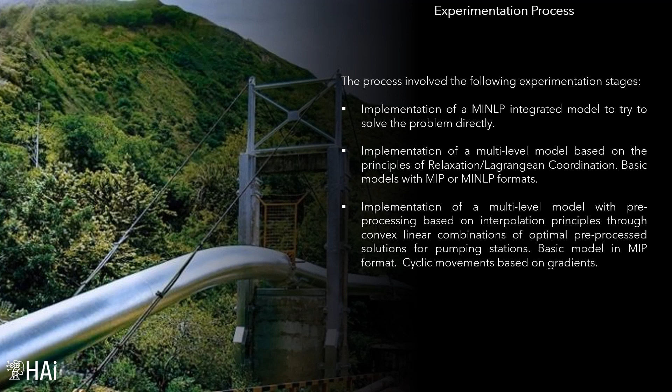Multi-level model based on a mix of methodologies. The strategy is based on 4 stages and 7 optimization models, which are solved using Lagrangian model coordination methodologies.

The first stage is the offline preprocessing, which consists of 3 processes: 2-dimensional flow pressure surfaces, convex or non-convex hull, of optimal energy consumption, and the corresponding configuration at each pumping station, to meet a flow rate Q at a pressure P, for each type of crude oil.

Definition of the 2-dimensional feasibility zone, Q, P, of the operation in the pumping station for each type of crude oil, and definition of the detailed hydraulic behavior of friction and gravity pressure loss in the pipeline system. This information comes from the expert system, that stores the operating patterns of all pumping stations for all oil products.

The second stage is the online preprocessing, that focuses on the domain reduction of the possibilities in the pipes. It determines the possible batches that can pass through a section J during a period T. In this way, the dimensionality of the model is reduced, since only the feasible tender section period combinations are considered, and this preprocessing depends on the data of the run, and must be done before starting the optimization process.

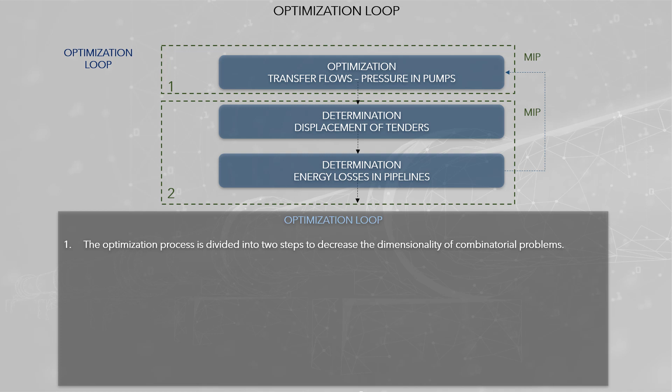The third stage is the optimization loop. The optimization process is divided into 2 steps, to decrease the dimensionality of combinatorial problems. The first step has 3 sub-steps.

It ignores the displacement of the tenders along the system, and therefore approximates the friction losses in the sections in the different periods, which are calculated based on an estimated curve, that is assumed to reflect the characteristics of the tenders that are passing through the section during a period.

It simultaneously considers all the periods of the planning horizon, and all the sections of the pipeline system, in order to obtain an optimal solution, ensuring that the pressure constraints are met along the pipeline system, and the flow of products through the pumping stations is detailed, that is, it considers for each period the tenders that are passing through the station.

The second step has 3 sub-steps. It determines the displacement of tenders along the pipeline system, thus determining which tenders are passing through each section for each period, and based on the above information, it is determined which is the best curve of friction losses that represent what happens in a period for each section.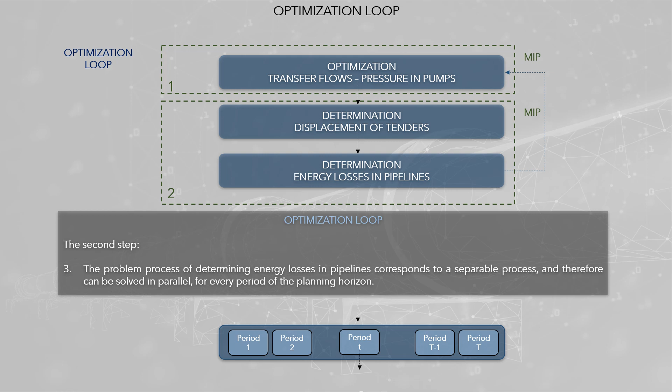This information is fed back to the first step. The problem process of determining energy losses in pipelines corresponds to a separable process, and therefore can be solved in parallel for every period of the planning horizon.

Once the iterative optimization process has been stopped, the fourth stage is post-processing, and it is related to optimization of pumping stations operation. It has two steps.

The algorithm proceeds to review for each period, and for each pumping station, the optimal conditions of the operation, according to the flow pressure pairs established as optimal scheduling, and the algorithm corrects the approximation that is generated due to the size of the grid that is used to linearize the optimal consumption in the optimization loop step, since during this process the problem is solved for exact values of the pumping plan, not for values of the grid limits.

The image shows the optimization loop flowchart.

Computational solution. The current state of the computer technologies involves the integration of edge computing and cloud computing to implement systems with multiple highly complex mathematical models that can be run in parallel.

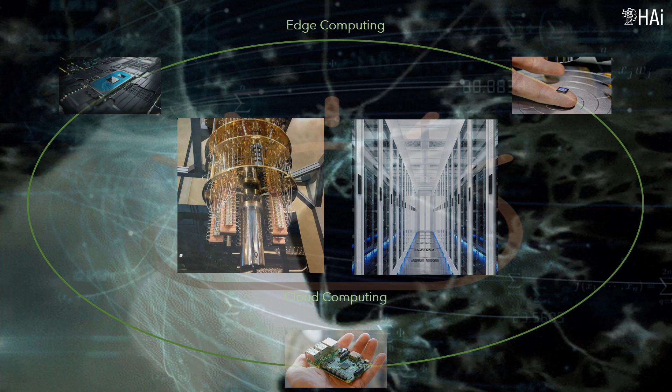The implemented solution involves two phases of computer operation. Offline, it occurs when computers are not engaged in the optimization process and are dedicated to generating information that will be used on the next occasion that is required to optimize.

During this phase operate tasks related to generation of convex hulls, and generation of information related to predictive analytics methodologies.

Online, it occurs when computers must meet the immediate demand for optimization processes. In this phase, computational resources are oriented to autonomous real-time distributed optimization, using in parallel large-scale methodologies to solve the problem.

The offline convex hull generation is a semi-automatic process, which must be performed when new products are going to be incorporated into the pipeline.

It can be carried out in parallel, since strictly each point of the grid can be optimized independently for each product in each pumping station. However, the chain sequential optimization of a product in a station can take advantage of an optimization process that considers how the grid is covered.

The online optimization is a process that in its first part is not parallelizable. This is because displacement of all tenders are intertwined.

The adjustment of the operation of the pumping stations is parallelizable, which can accelerate the final optimization when the number of periods of the planning horizon is large, that is, when the duration of the periods tends to zero. This is typical of optimal control models.

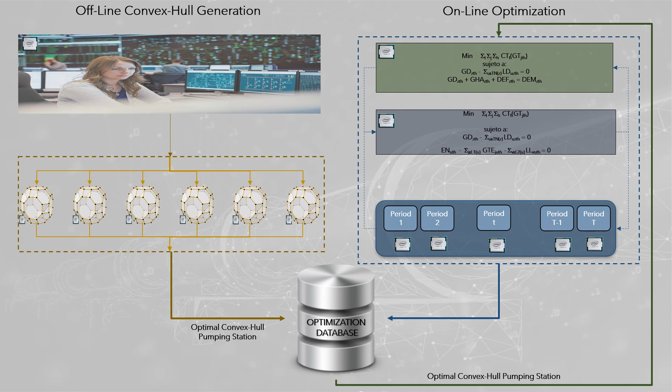To solve the problem, a set of GAMS programs were implemented. The main characteristics are basic solvers: linear mixed programming with IBM CPLEX, Gurobi, and/or Xpress, and nonlinear programming with CONOPT.

At the request of the end user, the system was implemented in an Excel interface, from which the operator performs programming and analyzes the results.

The structure of the implementation is shown in the image. The user interface has two parts: access to the information system and control of execution.

The screenshot presents the header of one of the GAMS programs.

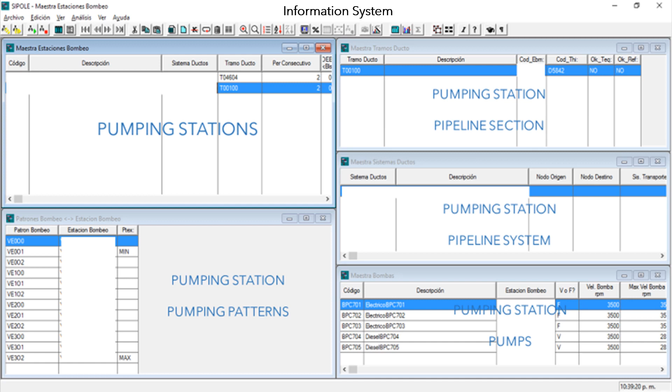The screenshot presents a shell window containing the master table of pumping stations, and 4 data windows containing tables related to that master. These tables are in a SQL database.

Case: Oil Express Pipeline Real-Time Optimization.

Case: Oil Express. Description: The Oil Express pipeline is composed of 2 pumping stations and a maritime terminal, FSO terminal. The crude oil is stored in tanks and then transported by the submarine pipeline to the floating oil storage unit for the loading of the tankers.

PSO2 pumping station is in charge of giving more pressure to the 20,000 barrels of oil that are received per hour from the PSO1 station and that are sent to the FSO maritime terminal.

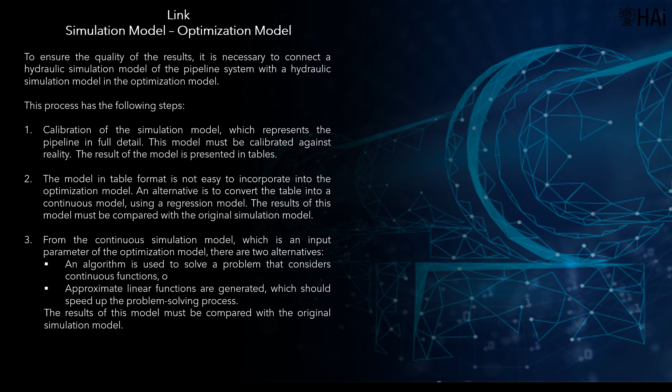To ensure the quality of the results, it is necessary to connect a hydraulic simulation model of the pipeline system with a hydraulic simulation model in the optimization model. This process has the following steps.

Calibration of the simulation model, which represents the pipeline in full detail. This model must be calibrated against reality. The result of the model is presented in tables.

The model in table format is not easy to incorporate into the optimization model. An alternative is to convert the table into a continuous model, using a regression model. These 2 models are run offline, and their results can be stored in the offline database.

The results of the pipeline approximate regression continuous simulation model must be compared with the original simulation model. The main objective of the simulation model is to validate the accuracy of the hydraulic model, pumping stations and pipes, which will be used in the optimization model.

The table presents 4 of the comparisons made, for pressure flow pairs, for heavy crude oil, at the PSO1 pumping station. The mean error for energy consumption was 0.23%.

The optimization hydraulic model is solved online by the real-time optimization model. The main objective of the simulation model is to validate the accuracy of the hydraulic model, pumping stations and pipes, which will be used in the optimization model.

The table presents 4 of the comparisons made, for pressure flow pairs, for heavy crude oil, at the PSO1 pumping station.

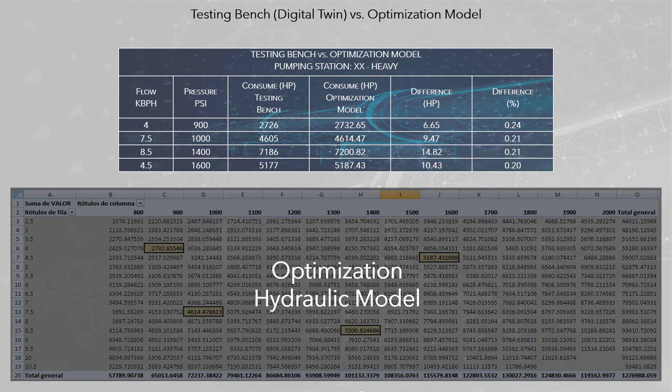The mean error for energy consumption was 0.23%.

Case: Oil Express. List of variables and models.

The optimization process has been divided into 3 sequential stages, to solve the problem in parts, reducing as much as possible the process time required each time the models need to be run, to define a new pumping plan. The 3 stages are: pre-processing, which involves the analysis of information from the pipeline system, with a view to preventing the optimization model from repeating calculations that can be performed in advance, whose results may be permanent, with the aim of minimizing the time to solution.

2 types of pre-processing are considered: offline, before starting the optimization process, to calculate parameters that are independent of the operating scenario; and online, before starting the optimization, but when the optimization scenario has been defined.

Optimization: every time a pumping plan is required, a 72-hour planning of the operation of the pumping stations, an optimization problem must be solved, which has been divided into 3 processes to control its dimensionality and solve it in the shortest possible time.

Post-processing is aimed at defining details of the problem that may have been approximated during the solution of the optimization model.

The table presents the indexes used in the model, which correspond to the entities, or objects, of the information system. For all these entities, a master table must be created, and all tables that define the relationships between entities.

The table presents the variables of the CTLN model for convex hull generation. Case: Oil Express. Real scenario results.

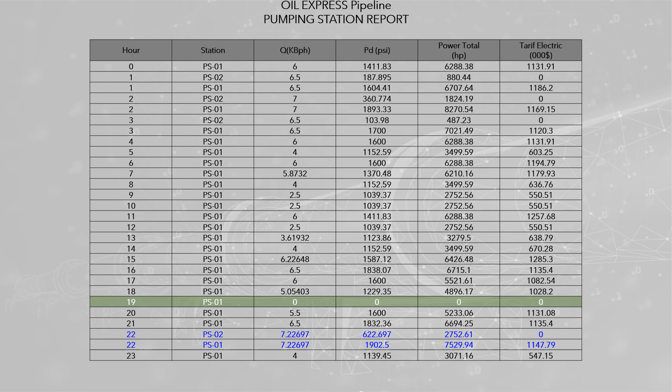In the table, the hourly report that produces the model for each pumping station is presented. It is concluded that, due to the high cost of electricity shown in the previous graph, at 7 p.m. there is a pumping stop at the PS-01 station.

The table presents the results for stations PS-01 and PS-02. The table presents the report by pump.

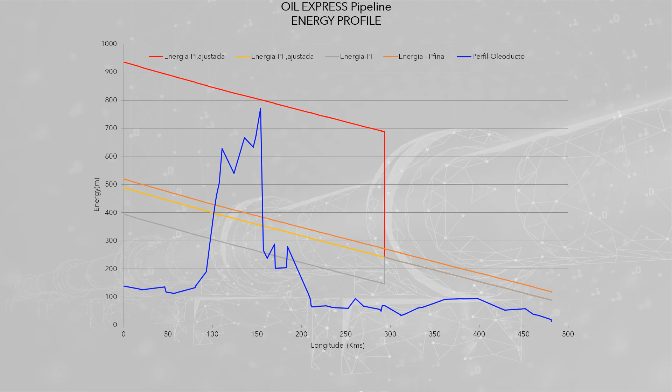To compare pipeline operation policies, 2 experiments were conducted: economic policy, minimization of the cost of operation, shown in blue, and environmental policy, minimization of energy consumed, shown in green.

The stop in the minimum energy consumption policy is due to the minimum pumping flow in the station, since, if possible, the optimal policy should be to maintain the flow fixed around 5 kb per hour.

Comparing the results of the objective function of the 2 operating policies, it can be observed that the minimum energy policy generates 16.21% of overcost, and the minimum cost policy generates 19.43% of overconsumption.

As you can see, the differences are not negligible, and are a measure of the precision that mathematical models can provide when solving real-life problems. Estimating this difference based on good practices and/or mental models is practically impossible.

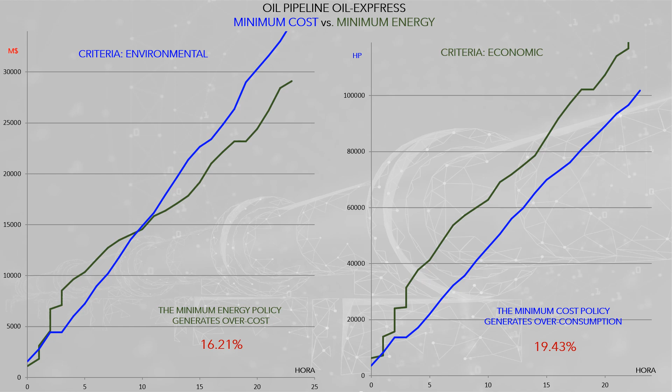Homeland Security. Case: Defending Critical Infrastructure. This section is based on the paper Defending Critical Infrastructure.

In 2002, the USA Department of Homeland Security deemed 13 infrastructure sectors that must be protected: agriculture, banking and finance, chemical industry, defense industrial base, emergency services, energy, food, government, information and telecommunications, postal and shipping, public health, transportation, and water.

Critical infrastructure protection involves developing tools to anticipate, identify, and measure the risks to which a nation or region's critical infrastructure is exposed, in order to reduce the risks and consequences of an attack. Bi-level and tri-level optimization models are used to make critical infrastructure more resilient against terrorist attacks. Each model features an intelligent attacker, terrorists, and a defender, us, with information transparency and sequential actions by attacker and defender.

Three real examples are presented: the U.S. Strategic Petroleum Reserve, the U.S. Border Patrol at Yuma, Arizona, and an electrical transmission system. Each exercise gathers open-source data on a real-world infrastructure system, develops an appropriate bi-level or tri-level model, and uses these to identify vulnerabilities in the system or to plan an optimal defense. Only the first case is discussed in this presentation.

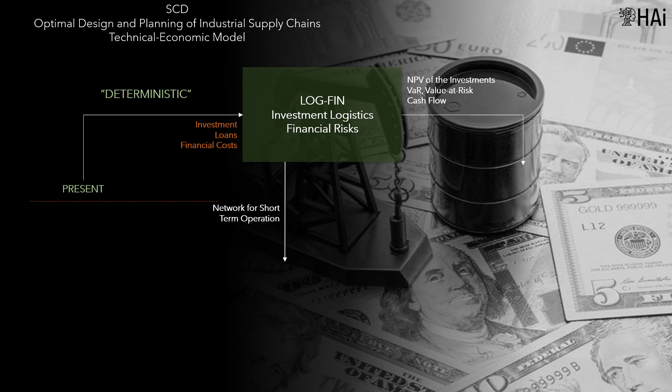The first model will be called LogFin. It is oriented to define the investments to be made in infrastructure necessary for production. It corresponds to a dynamic model that defines, for each period of the planning horizon, the investments to be made and the network for short-term operation. As input parameters it should consider the costs of investment, rate of return on capital, the costs of loans, payment period, and other financial considerations. Model constraints are related to investment logistics and financial risks. The main results of the model are NPV, net present value, of the investments, VAR, value at risk, cash flow, and network design for the first periods.

The second model will be called SANDOP. It is aimed at simulating industrial operations for each possible network proposed by the investment model, LogFin. As input parameters it should consider, at least, the forecast of demand of final products, raw material supply, operational costs, and sell prices.

The model can be extended to consider other aspects such as technological innovation, that affects the productivity of processes, new technologies, which may affect market prices, and others that are considered convenient. In general, all input parameters are uncertain, and it is appropriate to consider that this makes a stochastic programming model based on scenarios. This characteristic makes the LogFin model a coordinator of the evaluation of the scenarios to be considered in SANDOP.

It corresponds to a dynamic model that defines, for each period of the planning horizon, the industrial operations, and the storages of materials. In certain cases, it may not be necessary to consider product storage, because it may have little impact on investment costs, and additionally, it may be considered that its offer is always provided by the market with stable prices. This is not the case for oil storage, where the market prices and the supply of oil and gas is uncertain with high volatility. The constraints of the model are related to the industrial production process.

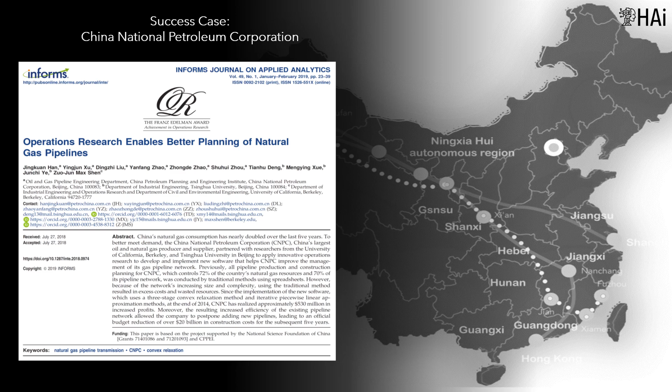Success case: China National Petroleum Corporation. The paper Operations Research Enables Better Planning of Natural Gas Pipelines presents the use of mathematical optimization models for pipeline planning. China's natural gas consumption has nearly doubled in the past 5 years. To better meet demand, the China National Petroleum Corporation, CNPC, China's largest producer and supplier of oil and natural gas, partnered with researchers from the University of California in Berkeley and Tsinghua University in Beijing to apply operations research to develop and implement new software to help CNPC to improve the management of its pipeline network.

Previously, all pipeline production and construction planning for CNPC, which controls 72% of the country's natural gas resources and 70% of its pipeline network, was done by traditional methods using spreadsheets. However, due to the increasing size and complexity of the network, the use of the traditional method resulted in excessive costs and wasted resources. Since implementing the new software, which uses a 3-stage convex relaxation method and iterative piecewise linear approximation methods, in late 2014...

CNPC has obtained approximately $530 million of American dollars in increased earnings, 2015 to 2017. In addition, the resulting increase in the efficiency of the existing pipeline network allowed the company to postpone the addition of new pipes, leading to an official budget reduction of more than $20 billion of American dollars in construction costs for the following 5 years.